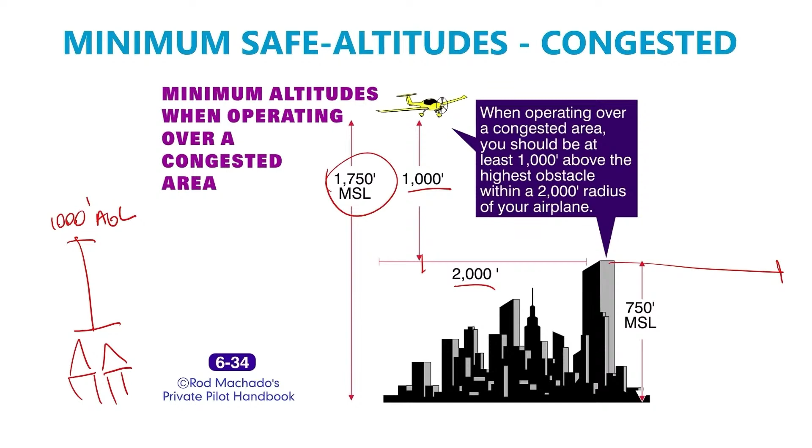The other one we have is minimum safe altitudes in what's known as an other than congested area. Very simply, if you're in more rural areas—the example I like to use is out in Camarillo, California, at the airport we used to fly at, surrounded by farmland—that's kind of that rural or other than congested area.

The magic number you want to know is 500 feet AGL, above whatever happens to be out there. If you're flying over farmland and then get a bunch of houses over the farmland, you'd want to be at 500 feet AGL, and you'd obviously want to increase that as you move into more congested areas, to at least 1,000 feet AGL. But remember that catch-all rule: you always need to be at an altitude which allows you to make an emergency landing in the event of an engine failure, without causing harm to persons or property on the ground.

The other one we also have, which is a little bit different, is in sparsely populated areas.

So this would apply if you're truly in the middle of nowhere, potentially farmland as well, or you're potentially just over water. At that point, then the thing that you need to remember is this statement right here, which is 500 feet from any person, vessel, vehicle, or structure.

So very simply, if you are cruising the open sea of the Pacific, and magically there is a Viking boat, because that's the only thing I know how to draw, sorry guys, and you're basically flying along, you could fly along an inch above the surface of that ocean. Once you start approaching that vessel, in this case, you just need to be 500 feet away from it on all sides, and then you can basically drop back down to the ocean.

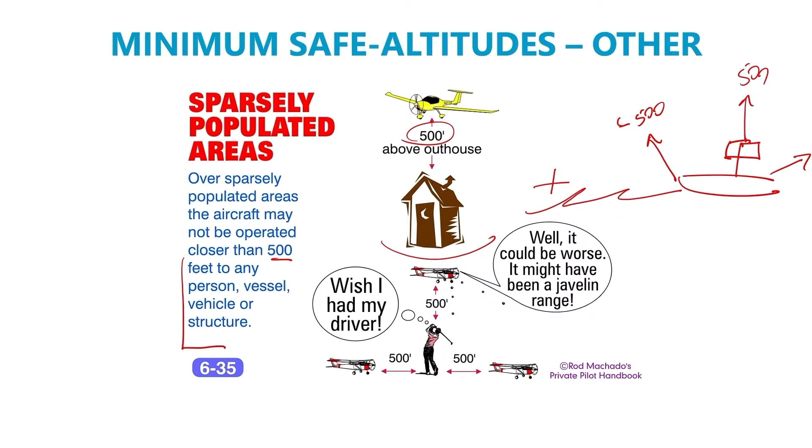Except when necessary for takeoff or landing, what is the minimum safe altitude required for a pilot to operate an aircraft over other than a congested area? Is it A, an altitude allowing, if a power unit fails, an emergency landing without undue hazard to persons or property on the surface? B, an altitude of 500 feet AGL except over open water or sparsely populated area, which requires 500 feet from any person, vessel, vehicle, or structure. Or C, an altitude of 500 feet above the highest obstacle with a horizontal radius of 1,000 feet.

All right, got the first couple answers rolling in.

Josh in Rapid City was asking, are the rules changed based on passengers? Nope, these are basically the rules regardless if it's just by yourself or if you are flying with passengers.

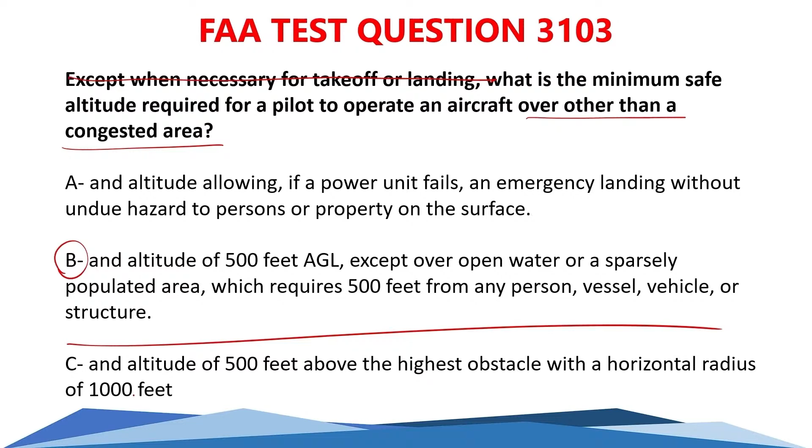Jake was asking, when flying into small airfields in a city, can you break the 1,000-foot rule if you're on approach? Yep, so obviously if you are on approach or departure, basically you're taking off and you're landing, then this rule does not apply. That's really the only time that it doesn't apply.

91-121, we learned about our altimeter the very first week of class, and the main thing that you guys need to remember is that the regulations require that any time you are operating an aircraft below 18,000 feet MSL, which is basically where Class Alpha airspace starts, you have to have a current altimeter setting at least at a minimum of every 100 nautical miles.

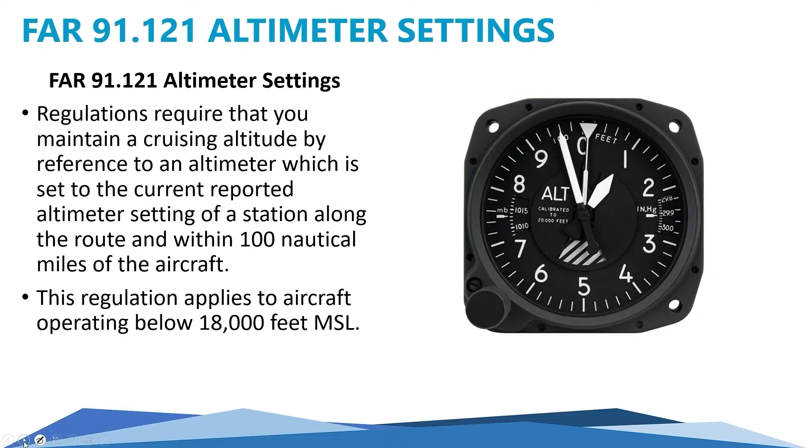So don't worry too much about how we get these. There's plenty of ways: we could get this from ATIS information when we're taking off or going to a towered airport. We can get this from different aviation weather services. We can get this from flight service stations. Really, the only thing we need to pay attention to is making sure we have a current altimeter setting at least every 100 nautical miles, since that is the regulation.

The other folks who will also provide this to you are controllers. So if you are basically going on flight following and you're getting a handoff from one controller to another, they'll go ahead and remind you of whatever the local altimeter setting is in your area that you happen to be flying in.

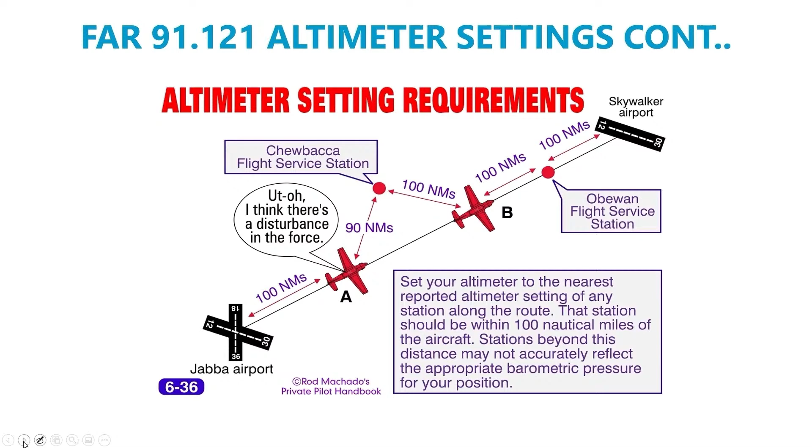91-123, this is air traffic control compliance. This is a 4-part regulation. Part 1 states that when air traffic control clearance has been obtained, no pilot in command may deviate from that clearance unless an amended clearance is obtained, an emergency exists, or in response to a TCAS, a traffic alert and collision avoidance resolution advisory.

So really the main thing is that if you guys end up getting a clearance, the only time you can deviate from it—if they tell you to hold an altitude or hold a direction—is if you either get an amendment, or there needs to be some type of emergency.

This last bit here is called a TCAS RA. The TCAS is basically mainly used for business jets and primarily in the airlines. It's basically just providing target information to the pilots of those airlines. And then the RA is called a resolution advisory.

You guys won't have this technology, but if someone basically penetrates a certain area in and around an airliner, the RA will come alive. What we're supposed to do as pilots is disengage the autopilot and manually fly it. The airplane computer will tell us to climb or descend at a certain rate—how many feet per minute—in order to avoid a collision. So you guys will not have that capability, but everything else still applies.

Part 2 of the regulation basically states that except in an emergency, no person may operate an aircraft contrary to an air traffic control instruction in an area in which air traffic control is exercised. So if there is an area that has ATC services, which is pretty much everywhere except Class Golf, and you do receive an instruction, you do have to comply with that.

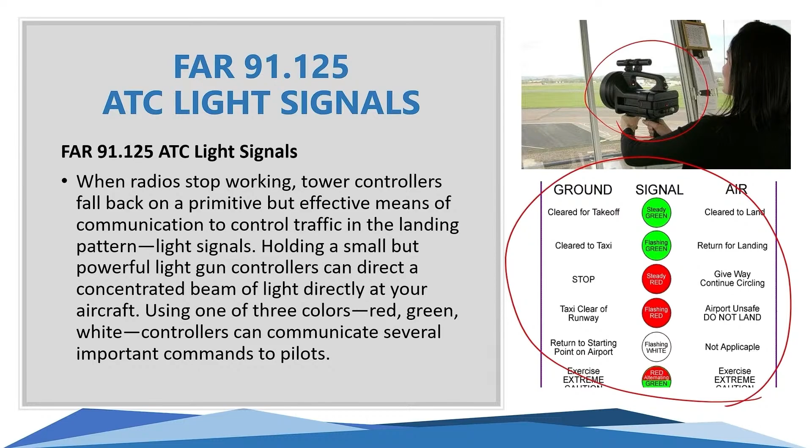Feel free to take a screenshot of it. Unfortunately, there's not too many cheats with this.

And if you're flying during the day, an additional 30 minutes of fuel. For nighttime, it's basically enough fuel to get to your intended destination, plus an additional 45 minutes of fuel.

Now keep in mind, these are your legal minimums. We're going to talk about something called personal minimums, which are usually going to be greater than the legal minimums. Some students I know will say, I refuse to abide by that, I don't want anything less than an hour in my tanks when I land. And that's something you could do.

To put it into perspective, regardless if I'm flying VFR or IFR, the IFR minimums are always going to be more strict. So personally, I always go by the IFR minimums. You guys do not need to know this, but IFR minimums mean you basically need enough fuel to get to your first point of landing, then an alternate airport, and then an additional 45 minutes beyond that. That way I've got more options.

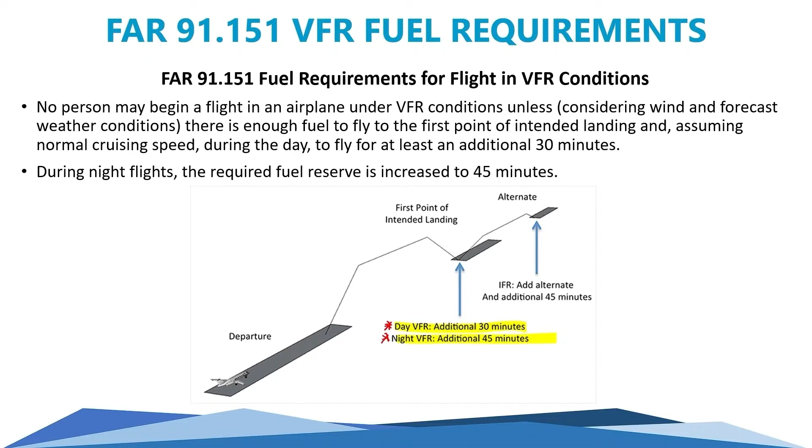All right, 91-159. We're going to use this information quite a bit, what we just looked at with fuel, and also our cruising altitudes when we do our flight planning section in a couple weeks here. Anytime we're flying for long periods of time, really anytime above 3,000 feet AGL, we are going to be at specific altitudes, either an odd 1,000 plus 500 feet, or an even 1,000 plus 500 feet. This is based upon whatever our magnetic track direction is.

Very simply, if you're flying on a magnetic heading anywhere between 0 and 179 degrees, you'll be flying in odd thousands plus 500. The easy way to remember this, sorry to all you East Coasters, but for the West Coasters, we think people on the East Coast are very odd. So if you're going to the East Coast, you need to be at an odd 1,000 plus 500. Some examples would be 3,500, 5,500, 7,500, 9,500, the list goes on.

If you're going westbound, anywhere between a magnetic track or heading of 180 to 359, you'll be at an even 1,000 plus 500, so 4,500, 6,500, 8,500, 10,500. And if you're going to basically be zigzagging, starting part of the trip going one direction and then backtracking, that's where you would actually select a different altitude.

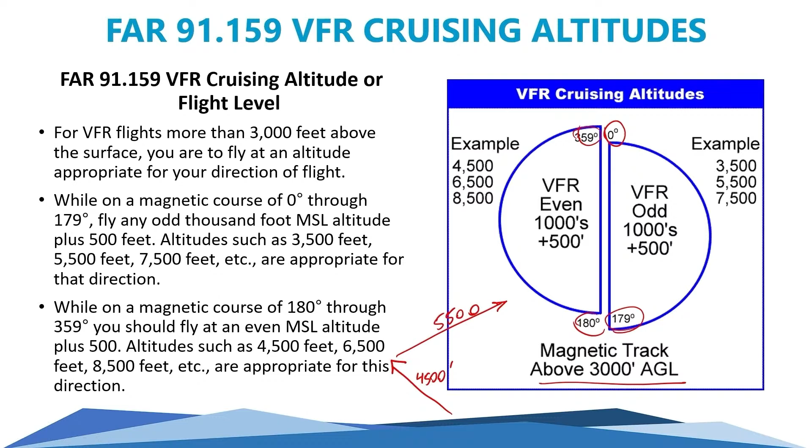Yes, west is even, odd, I know. But an easy way to remember: if you're heading east, East Coasters are odd. So if you're eastbound, it's going to be an odd 1,000 plus 500 feet. So you do have traffic split in between you. Just remember to choose the altitude that's most appropriate. We'll talk more about altitude selection when we get into flight planning, and a lot of times, at the end of the day, altitude is your friend.

91203, you'll notice a couple abbreviations. AC is aircraft for short, so these are your civil aircraft certifications. This is an acronym we use called ARROW, so you'd want to write this one down. These are things that have to be on board the aircraft anytime you want to fly. So if any of these are missing, the aircraft is not going to be deemed airworthy, and you're basically grounded until you get the documents.

So the first one is the Airworthiness Certificate. We talked about that a couple days ago on Monday. It's basically a document very similar to the birth certificate of an airplane. When it rolls off the factory line, it will have a date of issuance and someone who signs it from the FAA. It never expires.

Next one we have is your registration. So just like a car, we have to register an aircraft, pay our $5 every 3 years. It is valid for 3 years, and very simply, it'll have the name of the owner or the flight school on it. If you flip it over, there's about 5 or 6 reasons why a registration could become void.

So some of the biggest and obvious ones: if you destroy the airplane, then it becomes void. If you sell the airplane to a new owner, the registration becomes void. If the original owner loses their citizenship, or transfers ownership, or changes the tail number to a non-N number, that will also void the registration. So a couple examples there.

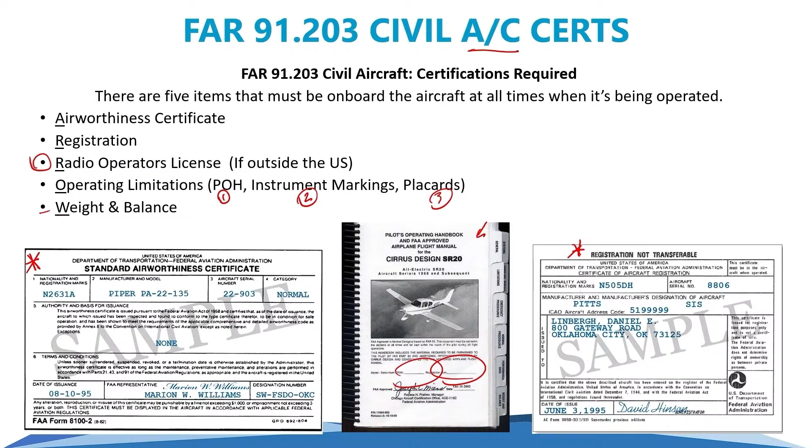All right, the next one we have is 91207. This is your ELT, also known as Emergency Locator Transmitter. It's basically a big plastic box, and the whole point of it is that in the event you got into a collision or accident or had any major contact with the ground or something else, it will automatically turn on and start doing its thing.

For the purposes of the ELT, it has to be inspected every 12 calendar months. What they're doing is inspecting it for installation, operation, battery corrosion, and for basically the presence of a sufficient signal that's radiated from its antenna.

These will usually be transmitted at least at a minimum on our emergency frequency, which is known as guard frequency on 121.5. And then some of the newer ones are also on the 406 frequency as well.

So if you want to test the ELT, you can do so only during the first 5 minutes of the hour, and you're only allowed 3 sweeps with it. So if you had a handheld radio, or if you're using the radio in the airplane, you could turn this guy on, and you'll actually hear the pings every single time that it passes.

The other thing you also need to do is, within this device there are batteries, and you have to replace the batteries at half of its useful life, 50% of its useful life, or if you've used the device for 1 cumulative hour of use. There's usually no Hobbs meter or anything that tells you how many hours you've used it. So if you think you used it for a significant or sufficient amount of time, you'd probably want to replace it anyway.

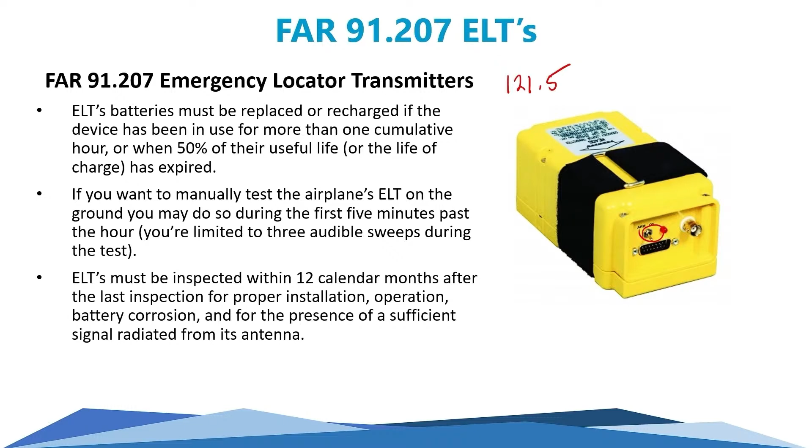So this is all basically recorded in an aircraft book, and then we know exactly when the battery came out, or it's basically going to expire in, let's say, 2031. So 50% of that would be that we would replace it basically in 5 years from now, which would be 2026.

Aircraft lights is 91209. Remember that official nighttime for airplanes is considered from sunset to sunrise. So very simply, from sunset to sunrise, you have to have your position lights on. These are usually going to be located on the pilot side - we've got the red light. There is a green light on the co-pilot side or passenger side. And in the very back, which we can't see, there's usually going to be a white light. So position lights always have to be on from basically sunset to sunrise.

Your anti-collision lights always have to be on regardless of the time of day, anytime the airplane is basically powered on or in operation. Traditionally, when we turn the battery master on when we get into the airplane, the rotating beacon or the anti-collision light is really the first light that's going to be on. And that's going to warn people that this airplane is about to start up, or it's currently in operation, meaning the engine is currently spinning.

Depends on the aircraft that you fly. For the most part, the anti-collision lights are traditionally in the Cessnas - they're usually going to be like a red light at the very top. Some of the other planes might have one on the bottom as well. In some Pipers I've seen, there are actually strobe lights on the wing tips that basically flash consistently. So you're going to have to figure out, depending on your aircraft, what is going to be considered your anti-collision lights as you're flying. That always needs to be in operation.

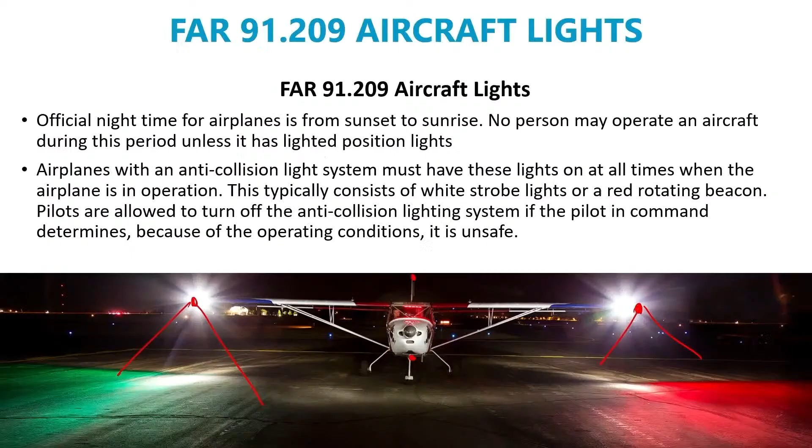All right, your transponder requirements are in 91.215. We're not going to talk about how a transponder operates, we'll get into that a little later today, but for now this is just the regulation. I'm going to show you an easier chart to memorize this rather than just looking at the words, since a lot of people get confused with that.

The other thing someone was asking about the other day is ADS-B. You do have an ADS-B requirement as well, your automatic dependent surveillance broadcast. We'll talk more about the mechanics of that system when we come back from the break. But right now I want to show you a chart exactly where you're required to have a transponder and an ADS-B. They are kind of two separate systems.

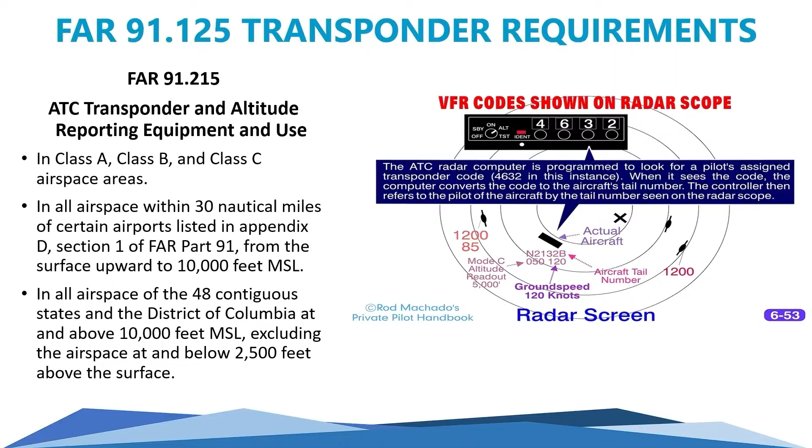The most basic transponder is just going to provide your location to air traffic control, and a Mode C transponder, or altitude encoding transponder, shows not only your position but also your altitude. As of January of last year, it became a requirement to have ADS-B installed in certain locations depending on where you flew. Now, even though this slide says ADS-B, the requirements pretty much align with your transponder requirements. So let's look at them side by side.

So very simply, for both ADS-B and a transponder, anytime you're operating in Class Alpha airspace, you're required to have an ADS-B and a transponder.

Simple as that, which is basically going to be from 18,000 feet to flight level 600. Anytime that you're operating in Class Echo airspace above 10,000 feet, ADSB is required and also a transponder, except for the space 2,500 feet AGL, where it's not required for ADSB or the transponder.

Anytime that you're operating in Class Bravo airspace, both an ADSB and your transponder are required from surface to 10,000 feet. Anytime that you're operating in a Mode C Veil, both your ADSB and a transponder are required from surface to 10,000 feet, on a 30 nautical mile radius that surrounds your Class Bravo airport.

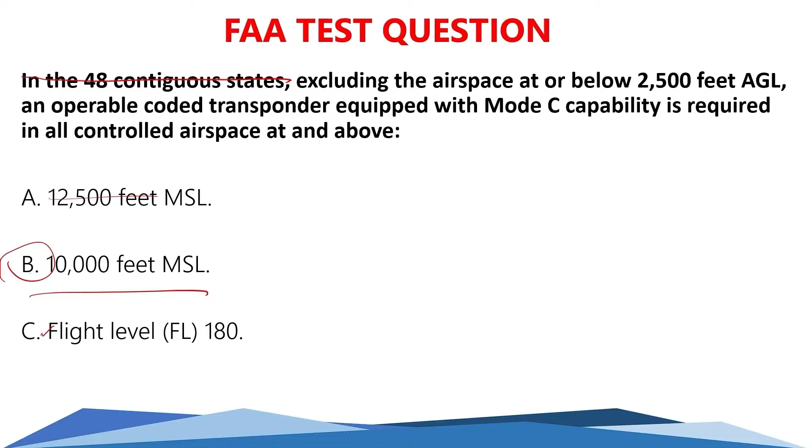If anybody wants to look at that again, it's saying excluding the airspace at or below 2,500 feet AGL, the operable coded transponder equipped with Mode C, which is that altitude encoding, it's going to be from 10,000 feet and above. Okay, so that's what the question is looking for. But flight level 180 is 18,000 feet.

Thanks, Douglas. All right, so going back just a step here, this is FAR 91.117, which is your aircraft speed limits, and it's going to be dependent upon what altitude you're actually flying in, and then of course what airspace you're actually flying in as well.

So very simply, anytime that you are above 10,000 feet, I don't really like to say this, but the books always tell you this, it's going to say no speed limit. The reality is that there is a more obscure FAR out there as well. So there is technically a speed limit, and the speed limit is anything below the speed of sound. So basically no sonic booms are allowed. But don't worry, your Cessnas and Pipers are never going to get up to that speed anyways. So generally, we usually say there is no speed limit.

Anytime that you're below 10,000 feet, your speed limit is going to be 250 knots. And keep in mind, all of these speeds are going to be indicated. It's not based on true airspeed, ground speed, or anything else in between. It's whatever you see on the face of your airspeed indicator, your indicated airspeed. If you're flying within Class Bravo airspace, it's also 250 knots.

And if you're going to basically be flying below a Class Bravo, meaning right below a shelf of a Class Bravo, or through one of those VFR corridors through a Class Bravo, it will be 200 knots, or as specified, at least for special flight rules situations.

The final one that we have is if you're flying within Class Charlie or Delta airspace, keep in mind that it's this specific requirement: no person may operate an aircraft at or below 2,500 feet above the surface within 4 nautical miles of the primary airport in Class Charlie or Class Delta airspace at an indicated airspeed of more than 200 knots. Okay, so what most people get wrong on this, though, is if we kind of go back to the dimensions.

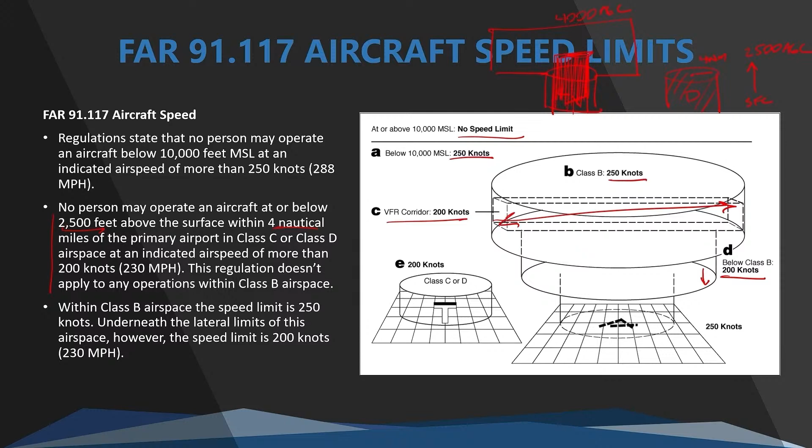The next one is 91.303 for aerobatic flight. Keep in mind that you cannot conduct any type of aerobatic flight over a congested area of a city, town, or settlement. The other thing you can't do is do it over an open air assembly of persons, or when less than 1,500 feet above the surface, or if flight visibility is less than 3 statute miles. So a lot of people ask, how do they do these at airports? They get waivers that basically bypass some of these rules, and they're very specific waivers that can be requested from the FAA.

You're also not allowed to conduct aerobatic flight within the lateral boundaries of the surface areas of Class Bravo, Charlie, Delta, or Echo airspace designated for an airport. You also want to stay away from any federal airways, which are kind of like highways in the sky with a lot of aircraft going back and forth, so they don't want you doing loops and rolls in that more congested part of the sky. Also, not every airplane is capable of aerobatic flight. If you're interested in aerobatic flight, make sure you go up with someone sufficiently trained as an instructor in that area. It's a unique type of training in itself.

91.307 deals with parachutes. Very simply, if you intentionally pitch the nose up or down more than 30 degrees, or intentionally bank the airplane right or left greater than 60 degrees, then each occupant inside that aircraft has to be wearing an approved parachute. That's really the rule with parachutes.

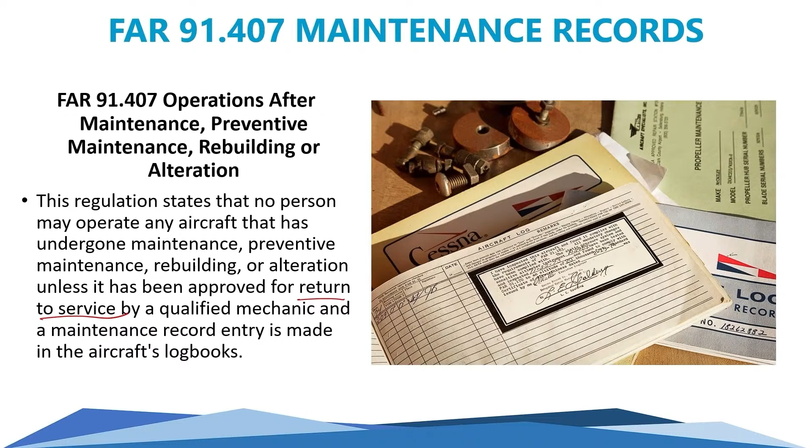Just like you have a logbook as a pilot recording all your hours, airplanes generally have 3 sets of logbooks: one for the airframe, one for the power plant (the engine), and usually another one for the prop as well. Depending on the type of aircraft, some of these can get fairly lengthy, and some older aircraft will have multiple versions or copies of the logbooks.

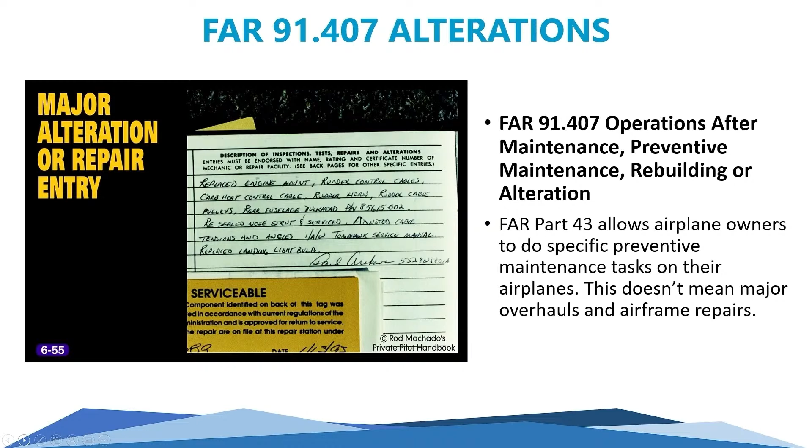Part 43 of the Federal Aviation Regulations, which deals with maintenance, basically allows the owner of an aircraft to do specific maintenance tasks. Keep in mind you need at least a private pilot license or higher—student pilots cannot sign off on this type of work. But this also doesn't mean you can do major overhauls. You can't take the wings off or repair major things, and you can't just replace an engine. That's not going to be considered preventative maintenance.

You can find the full list of preventative maintenance in 91.407. This isn't an all-exhaustive list, but if you go to the regulation you'll see even more things. Very simply, preventative maintenance—which can't be done by a student pilot, but can be done by a private pilot or higher—includes changing spark plugs, changing or replenishing hydraulic fluid in the brake lines, changing brake calipers, servicing landing gear, wheels and bearings, changing tires, doing oil changes, cleaning or replacing air filters, and replacing hoses. Those are all preventative maintenance.

At the end of the day, if you are doing preventative maintenance on your airplane, you will need to make an entry into the logbook.

You're basically going to do a quick narrative of whatever you accomplished. You changed the oil with 100 weight oil, and you put in 12 quarts, whatever you ended up doing. Change the oil filter, sign it, put in your certificate number. For you, that will be your pilot's number, and then the type of certificate that you held.

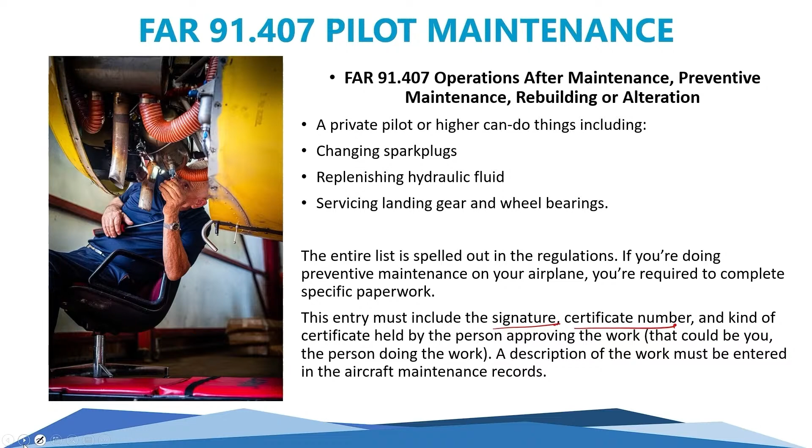So there's actually two different types of inspections that you're going to see. The annual inspection is due annually, every 12 calendar months, and no matter what, an annual needs to be done. Every single airplane that is flying has had an annual basically performed on it. And the annual is exactly the same inspection that would actually happen at the 100-hour inspection as well.

The two biggest differences between the annual and the 100-hour is that the annual has to be done by someone who is certified, basically an A&P, IA. The A&P is an airframe and power plant mechanic. The IA is the important part, and they basically have inspection authorization, and they've undergone additional training. They've taken some additional tests.

I think, don't hold me to it, some A&P can correct me, I thought it was like 3 years of experience as a basic A&P. Once they have that, they basically get these magical letters after their A&P license, and they can certify things on behalf of the FAA. One of the things they're usually certifying is the annual inspection.

So every airplane needs to have an annual. In the event that 12 calendar months comes and goes and an annual is not performed, that airplane is effectively grounded until it is performed. Now there's one way to get the airplane in the air, and it's really just in pursuit of maintenance. We can get that by requesting a special ferry permit, directly with the FAA local office, known as the FSDO, the Flight Standards District Office.

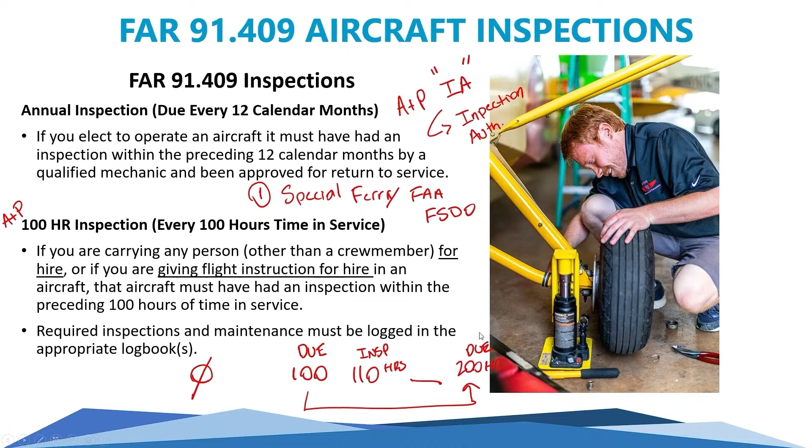91413 is your transponder inspection. Your transponder, just like anything else, needs to be inspected every 24 calendar months. They're going to put in the maintenance record, usually in your airframe log, the description of the work, and someone will sign off on it, and then it will be good for another 2 years.

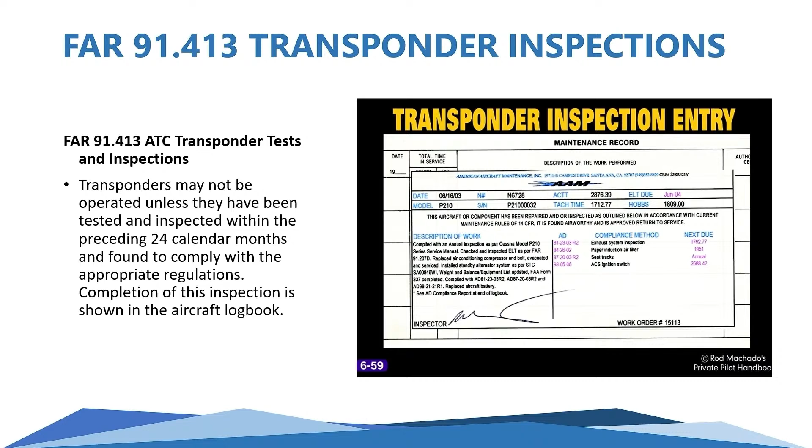Your maintenance records, 91417, as well as your maintenance records, are going to have all of your records for the annual inspections, the 100-hour inspections, major alterations, repairs, anything that's minor, and also any other required maintenance. Any frequent and additional inspections that may be performed on the aircraft, also known as airworthiness directives, will also be within these documents.

Most of these times, actually every time I've seen these, they're usually kept in a safe. Really, the value of your aircraft is tied up into these records, so they don't want them to disappear for a student to grab hold of them.

You do always have the opportunity, and you will be expected on your check ride, to pull out the official maintenance records and demonstrate that all of the required inspections we've talked about thus far have been completed, so that the examiner knows that you know how to check this information as well.

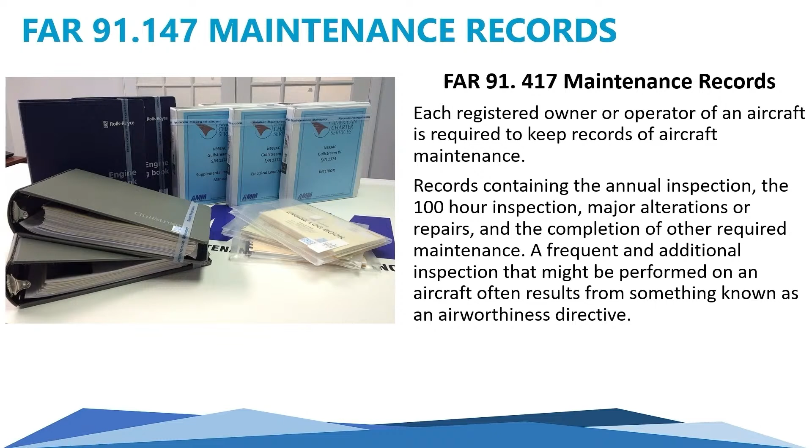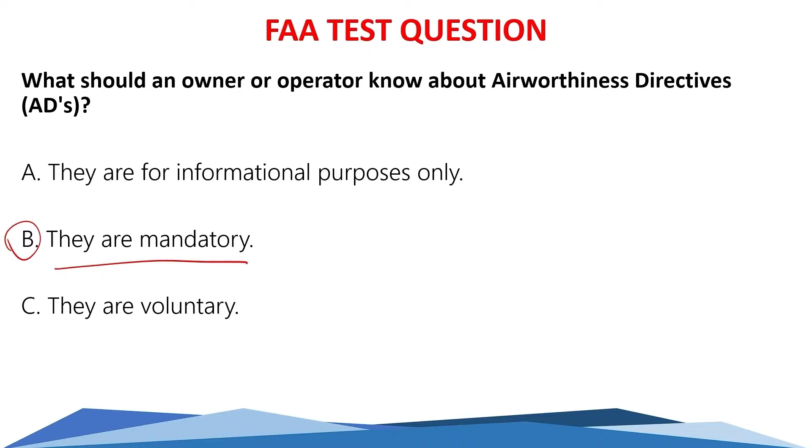All right, moving on. The next thing we're going to talk about is your NTSB regulations. These are basically what we call NTSB Part 830. They are slightly different than your federal aviation regulations, and these deal with any type of accident, incident, and your reporting responsibilities. Hopefully, at the end of the day, nobody ever has to actually utilize this other than just memorizing a couple components for the purposes of your written exam.

Now, if you do have the FAR AIM that I showed you guys the other day, pretty much every FAR AIM, all the publishers do include the NTSB Part 830 requirements in there as well, usually as a chapter, just because it's fairly pertinent to you being a pilot, okay? So with that, let's go ahead and take a look at a few things.

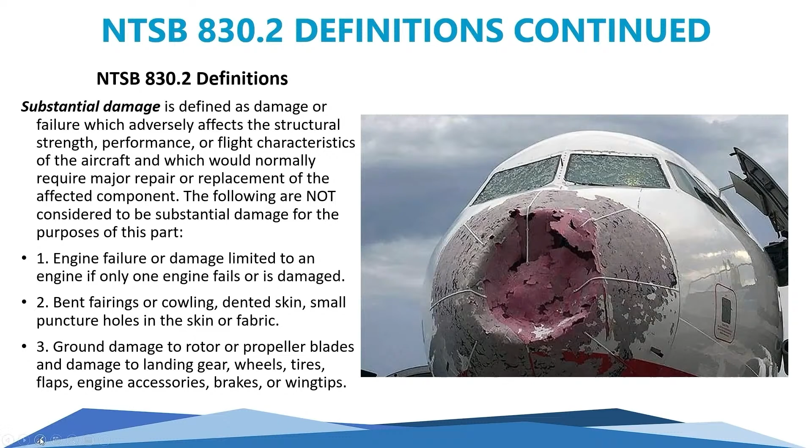Now there are, I believe, 8 different circumstances in which you are required to make an immediate notification. We'll talk more about what immediate notification means here in a second, but here they are.

The first one is any type of flight control system malfunction or failure. So obviously if your ailerons, your elevator, any of these major systems failed, those are all considered flight control systems. Inability of any required flight crew member to perform his or her normal flight duties as a result of injury or illness.

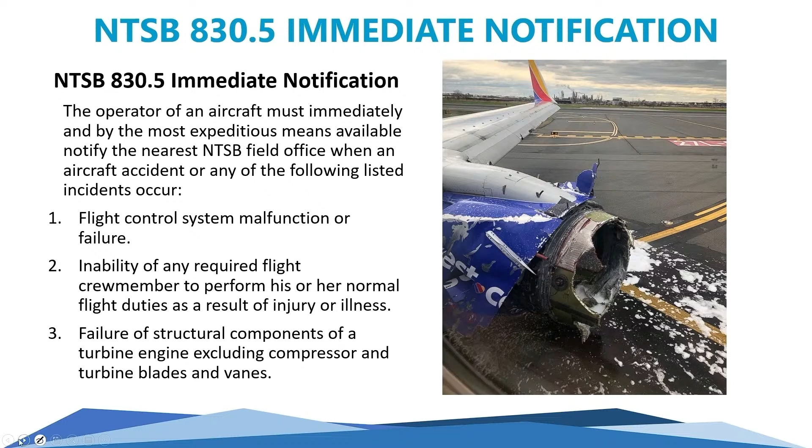Failure of structural components of a turbine engine, excluding compressor or turbine blades or vanes, won't really apply to you guys here. In-flight fire, any type of collision in flight.

This one you guys will see as an FAA test question, and it's important to know this number right here: damage to property other than the aircraft, where the estimate has to exceed $25,000 for repair or fair market value in the event of total loss.

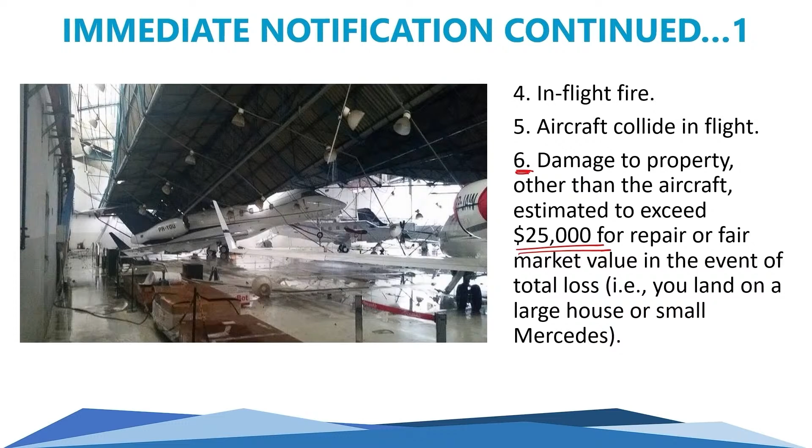So in this example, if you decide to accidentally taxi and clip the corner of a building, maybe a large hangar like this, and that corner happened to be a load-bearing wall, and the rest of the hangar dropped on all these wonderful aircraft out here, any time it exceeds $25,000, that would be an immediate notification. If it's $24,000 of damage, then it's not. So the threshold here is $25,000, and it also does not include damage to your airplane, but any other property damage or other aircraft damage is included.

There's a cool video on YouTube of a guy flying an experimental or home-built aircraft, and the next thing you know, he loses his prop blade. It just completely flies off. He makes a very good and safe emergency landing without the prop, gliding it back in. But if you lose the blade for whatever reason and it separates from your aircraft, that is an immediate notification.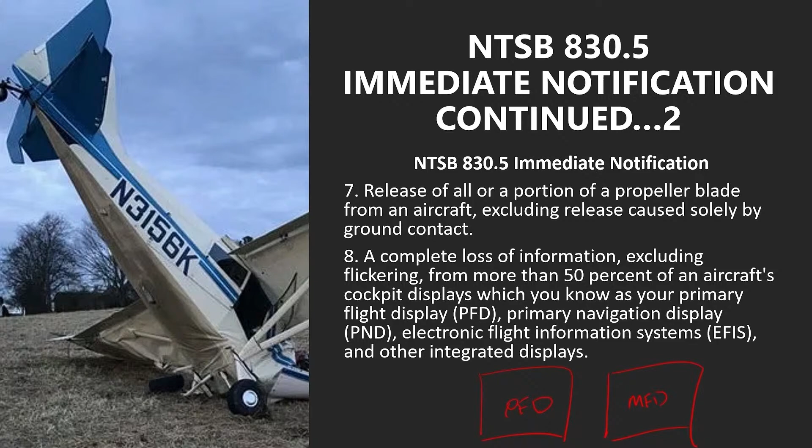Very simply, for those in the G1000, you're pretty much only having 2 screens. You've got your primary flight display known as your PFD, and you've got an MFD, which is your multifunction display. Effectively, if you lose one of those screens, then you'll have to make this notification as well.

NTSB 830.10 is dealing with any type of wreckage, mail, cargo, and records. What are your responsibilities? So if you're the operator of an aircraft that's involved in an accident or incident, it's actually your job to protect the wreckage and everything associated with it until the NTSB arrives and then assumes responsibility of the scene.

Keep in mind, obviously, rescue passengers and crew. Make sure everybody gets a safe enough distance away from whatever that is, and deal with any hazards as they come up. And then from that point, it's going to be just trying to protect the wreckage from any further damage, and also protect it from the public, so prevent anybody else from getting injured with it.

If you need to move wreckage, remember to make a note of it, take a photo of it, draw a sketch of it—whatever the original condition is. Basically, it's a federal crime if anyone was to take a part of that wreckage as a souvenir.

A couple of people back in 2003-ish, during the unfortunate space shuttle re-entry where it broke up over Texas, decided to take souvenirs from that accident. They were actually punished under that NTSB rule there.

NTSB 830.15 is basically your requirements in terms of when you need to report it. And these are the numbers that we need to memorize here. So an operator of an aircraft must file a report within 10 days after an accident, or within 7 days if an overdue aircraft is still missing.

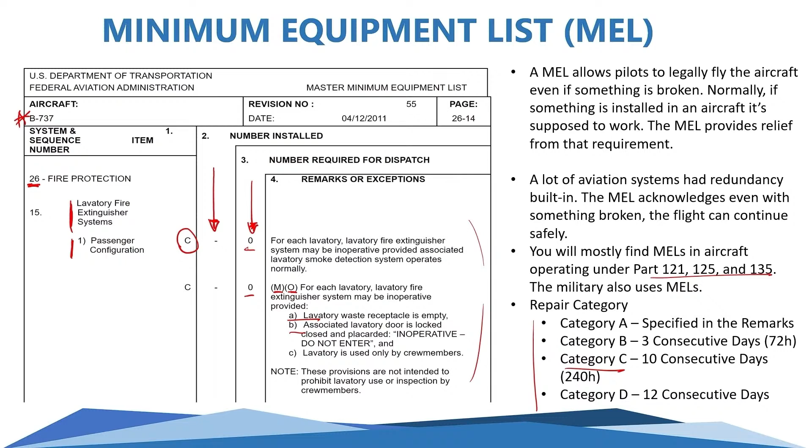Okay, so what we're going to do when we come back is we're going to do an airplane without an MEL, and we're simply going to follow this AC circular. Now, this AC circular 91-67 is no longer valid, it's an expired circular, but if you read the regulations, you'll see that all of these steps that I'm basically showing to you guys right now are in the exact same order, and I think it's still a good guidance document.

And the important thing that we're going to go through is each one of these steps. We're going to assume that one of our taxi lights is not working and we're doing a nighttime flight, and we have to go through step 1, 2 through 6.

A lot of students, what I see, have problems with their check rides is they jump immediately to step number 4, or they don't do it in the correct order. You do need to start from the top and work your way to the bottom and do it in the correct order for the purposes of your check ride.

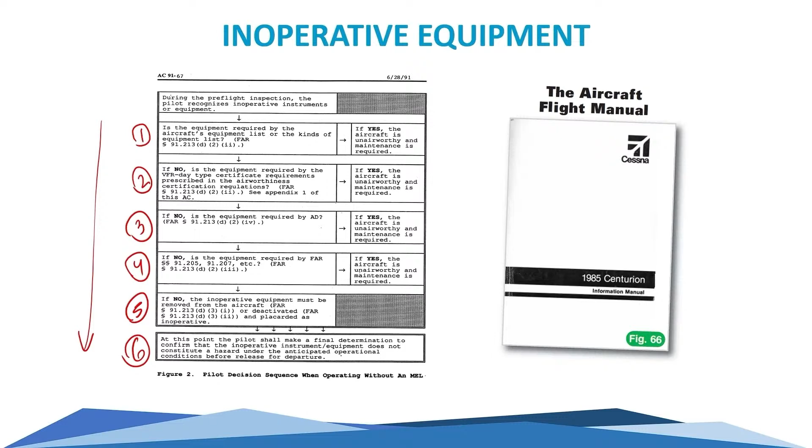So what an equipment list looks like and where we find that information is located inside of the airplane or aircraft flight manual, the AFM, or the pilot's operating handbook for your airplane. What you would do is go to the following chapters. Traditionally in the newer aircraft books, you would find your aircraft equipment list in chapter 6, if it exists, and you'd find your kinds of equipment list, the KOEL, in chapter 2. So you'd want to check both locations.

Once again, you may have one or the other, you may have none — it just depends on the manufacturer. Very simply, if we're looking at an aircraft equipment list, this is found in your weight and balance section, chapter 6. Really what we're doing is looking for the item number, anything that basically has an R after it. The R represents that it's a required item of equipment for the FAA certification.

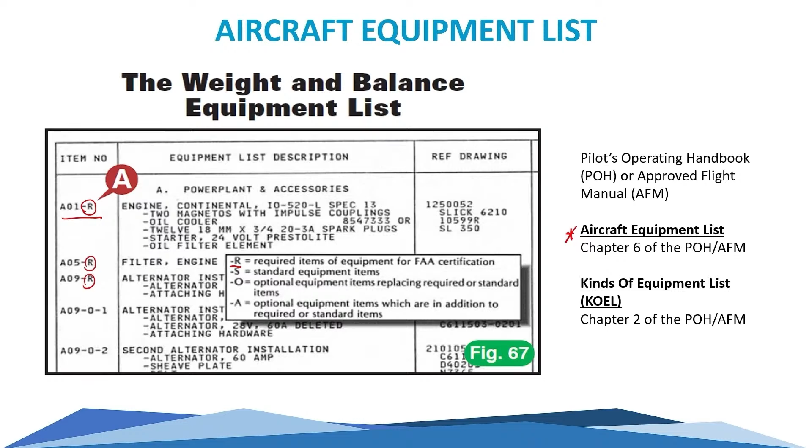So if anything with an R, an item number with an R, is broken or inoperative, then that means the airplane is effectively grounded until it is fixed. The other letters we have are S for standard equipment, O for optional equipment which replaces the required or standard equipment, and A for optional equipment and items which are in addition to required or standard equipment.

So the very first thing, assuming our airplane did have an equipment list, we would go to chapter 6 and look at the equipment list. For example, if the electric clock inside of the airplane was broken, we can see here that a basic clock is standard, and the optional upgraded digital clock is also not a requirement. So if that was the case, we would go to step number 2.

Now, if the magnetic compass was broken, maybe it was leaking fluid, or our fuel gauges were also broken or separately broken, then because it is a required item for certification, the airplane is going to be grounded until those items are fixed and signed off by the associated mechanic. So that's what an equipment list looks like.

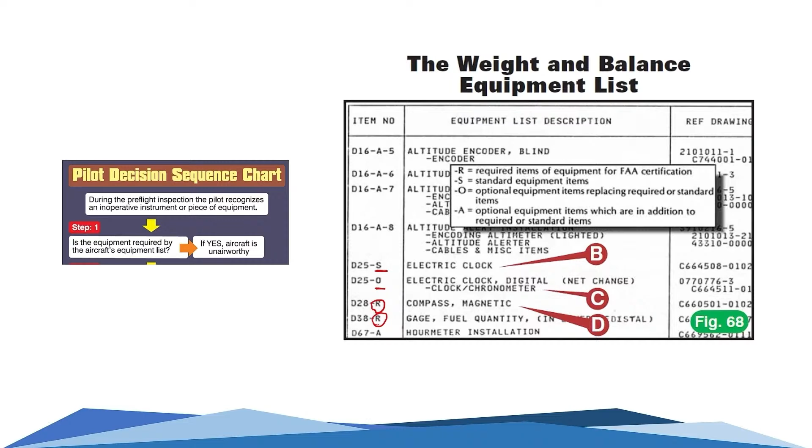If you do not have an equipment list, you might have what is known as a KOEL, which is a kinds of equipment list. This is one that I pulled from a Piper Warrior, basically a PA-28-161. This is located in chapter 2, or section 2, of the POH/AFM, where we basically have aircraft limitations.

All it does is tell you, if you're operating a daytime VFR flight, these are the things you absolutely need to have working. If you're operating at night, you need everything in the daytime list plus the nighttime list. And on the other page, they even have an IFR list. So if anything on this list was broken, depending on whether it's a daytime or nighttime flight, the aircraft would be grounded until you got that fixed.

Assuming you did not have that list, or couldn't find the item on the list - let's say we're doing a nighttime flight and our taxi light is broken, and we couldn't find it here. Okay, so that was step number 1.

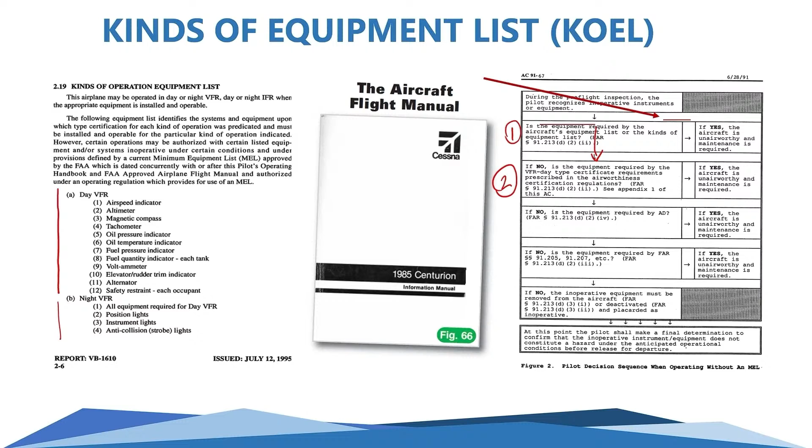If you can't find it, you continue to step number 2. It says, if no, is the equipment required by the VFR type certificate requirements prescribed in the Airworthiness Certification regulations? This is a document called the TCDS, or Type Certificate Data Sheet. You can search for your TCDS by manufacturer, make, model, or serial number.

You can go to the FAA website and search by a number of current or past models. Once you find the correct model, you'll usually find a PDF document that houses quite a few different makes and models. The one I'll show you right now is for the Cessna 172, which is a pretty common airplane.

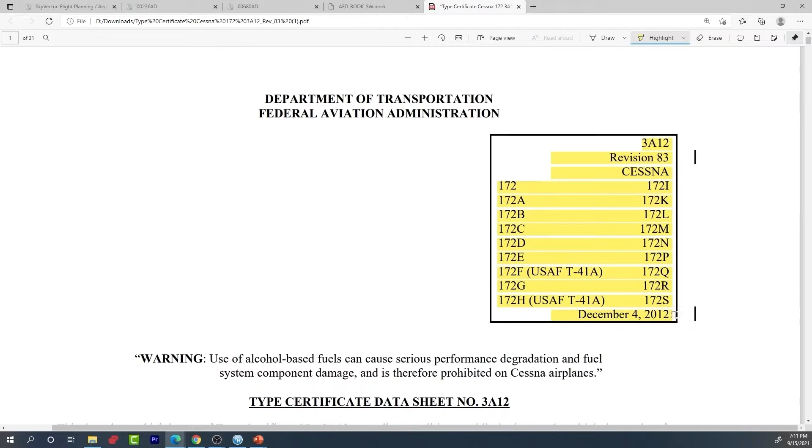This is the document right here - this is page 15, so I'll go back to the very front page. This is your type certificate data sheet. This document, about 30 pages, includes information from the FAA about all of these aircraft - all of the 172s, the basic 172, the Alpha, all the way through the Sierra models, which is one of the more recent ones.

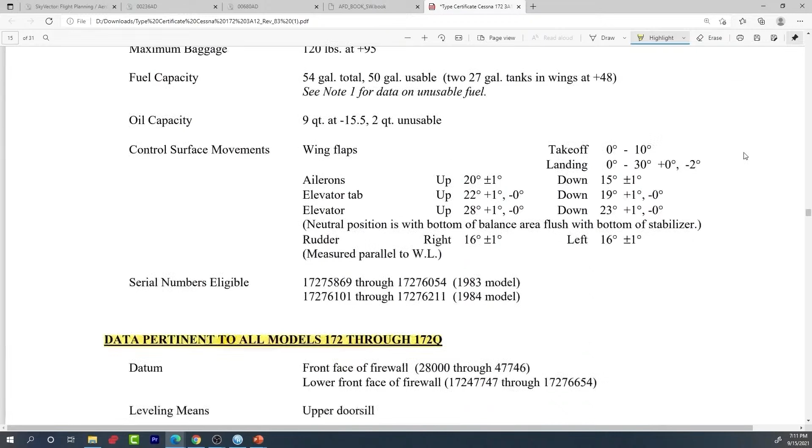Your type certificate data sheet is basically the birth certificate of an airplane. This document provides information on how the FAA actually certified this airplane to deem whether it was airworthy. So depending on the make and model - let's say we're looking at a 172 through the 172Q - it would have all the information, including serial numbers, so you can make sure you're looking at the correct airplane.

It has all the regulations in terms of how this thing was certified, what years it was based upon, and what we're looking for is the section called equipment. The equipment in all these airplanes must include a current airplane flight manual effective with the following serial number, so you'd make sure you have that information.

For number 1, if you're between model 172 through 172 Golf, you need a stall warning indicator with the following drawing, and basically the same thing for anything 172 Hotel and beyond. So for the most part, most 172s are required to have a working stall warning indicator or horn, whatever style is in your aircraft.

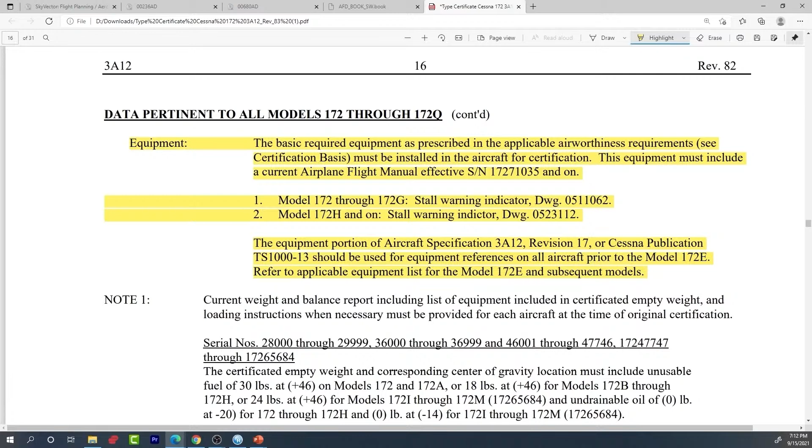So if your stall warning horn or indicator was broken, this document states that you've got to fix it, otherwise the airplane is grounded. Every aircraft is slightly different - Pipers don't have this requirement, you're not required to have a stall warning horn. It just depends, and you can find this information on the FAA website.

So that's what your type certificate data sheet is. In this case, if we look up the TCDS, we're not going to find anything required dealing with a taxi light. So then we move on to step number 3.

Step number 3 is, if no, then we cross-check against any airworthiness directives - are there any outstanding airworthiness directives we need to comply with or follow? To find airworthiness directives, you can search the FAA website, go to regulations and policies, then go to airworthiness directives, and search by make and model.

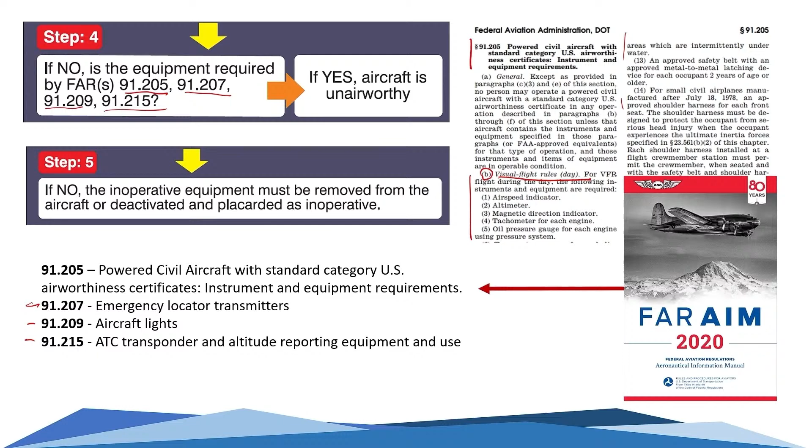The way we remember 91-205 is the following - we basically put those in a better order, we call this A TOMATO FLAMES: anti-collision lights, tachometer, oil pressure gauge per engine, magnetic compass, airspeed indicator, temperature gauge, oil temperature gauge, fuel gauge per tank.

Flotation is only for hire, and that's basically your life preservers, those types of things, assuming you're for hire and outside of gliding distance of land. Landing gear indicator for those with retractable gear, an altimeter, a manifold pressure gauge for more advanced aircraft - usually those with a constant speed or variable pitch prop, emergency locator transmitter, and then your seat belt or shoulder harnesses. It's always important to read the regulations though, because for example, safety belts, shoulder harnesses, and the anti-collision light - if you have an older aircraft, you might be grandfathered in where you're certified and don't need either one of those.

I'll leave that up for a second, let you guys write those down, and then we'll look at the nighttime ones as well. Or you guys can take a screenshot of it, whatever's easier there.

These you will get asked on your check ride, by the way, as well. You might see these on a couple of FAA tests.

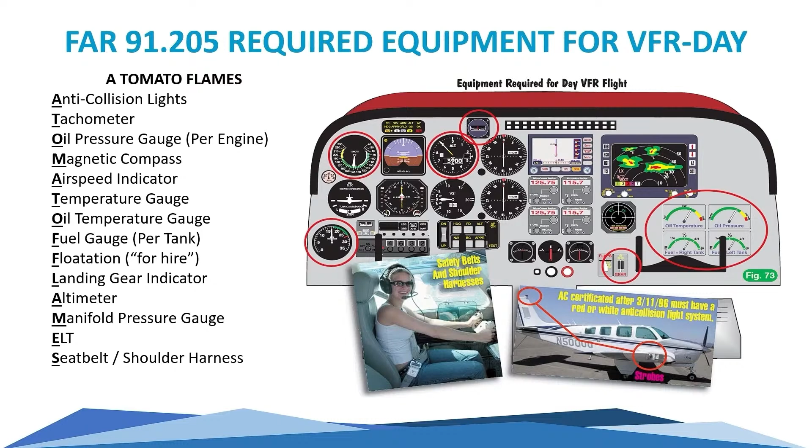After this, all of your daytime requirements apply if you are operating at night. So for us, we're saying that we're doing a nighttime VFR flight and our taxi light or landing light is not working. So what we would do is have everything within the column that we see for day. And then for our nighttime requirements, we would have to have flaps.

Most of you are not going to be operating on fuses, but if your aircraft still had fuses, you would need to carry at least 3 sets of each type. If you're on circuit breakers, then you don't need to worry about that.

The landing light is only required for hire. So in this case, we're not for hire, right? If we're a student pilot or a private pilot, we are definitely not taking people, because that's above our capabilities. So in this case, we can operate the airplane at night without a landing light or a taxi light. We are required to have an anti-collision light, a position light, and a source of power, which very simply could be a source of electrical energy like a battery.

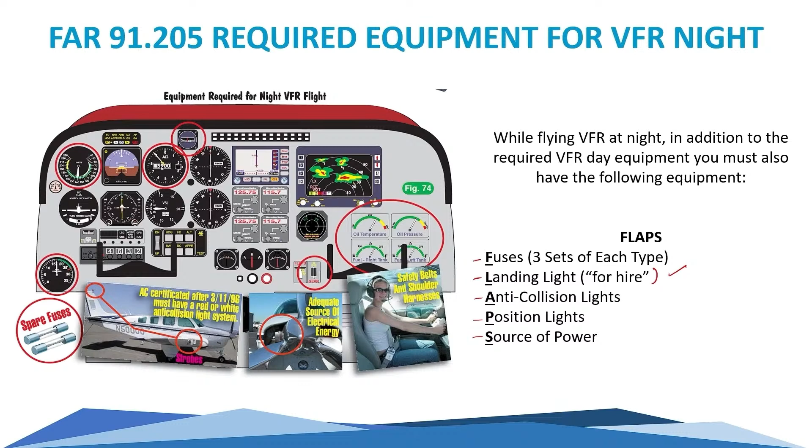Now that we know we can continue this flight, we have to do a couple things prior to jumping in the airplane. We have 2 options. The easiest way is basically to deactivate and placard whatever is broken. If you needed to do maintenance, maybe you replaced the bulb, maybe you didn't, maybe you just need to notate it or squawk it that the light is inoperative.

And then very simply, we just take either a Post-it note or one of those little printable pieces of tape and basically write the word inoperative, and put that right next to or on the circuit breaker or the switch that we have.

Now, deactivating it is usually going to be pulling the circuit breaker. If you do not know what the circuit breaker is, then just leave it alone. You do not want to accidentally turn off some other system inadvertently.

The other thing that you can do, besides deactivating and placarding it, is basically to remove it. This is not something a pilot will do. This is something usually a maintenance person will do. They will actually remove it and put it inside of the aircraft maintenance records. And if it is of applicable or appreciable weight, then they'll have to do a new weight and balance, usually if it's over a certain percentage.

Finally, after you do all of those steps, step number 6 is always the most important. We know legally that we can actually do a nighttime flight without a landing light in this circumstance. We've placarded it and deactivated it. Now we have to look at step number 6, which is: you, the pilot in command, has to make a final determination to confirm that the inoperative instrument or equipment doesn't constitute a hazard under the anticipated operational conditions before release for departure.

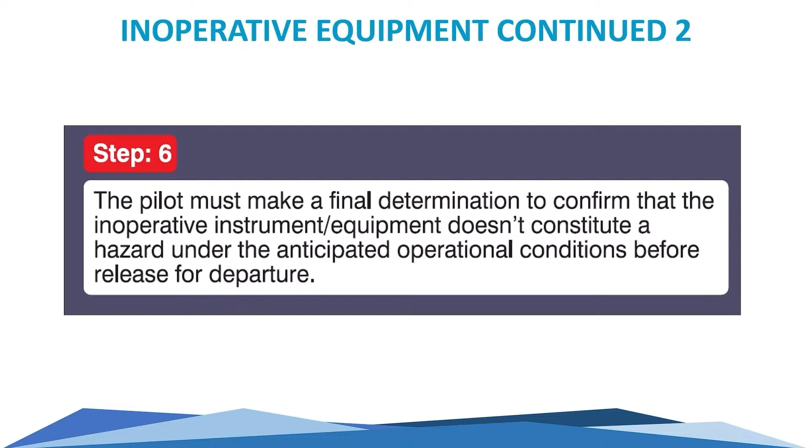Okay, so with that, let's go ahead and push on, and we're actually going to look at airport operations. As I said, this is 2 parts. We'll finish up anything we don't finish tonight on Friday, so don't worry like you're falling behind or anything. All right, so let's talk about airport layouts.

Now, anytime that we're dealing with an airport, obviously there's going to be some type of associated runway with it. And runways are not just paved in any old fashion or location. There's usually quite a bit of environmental studies that are done, and then what ends up happening is they figure out whatever the prevailing wind conditions are of that area or region.

So usually if you see only a single runway, for the most part, those are going to be the most favorable wind conditions. If you start to see a lot of different runways that crisscross, sometimes those could be either very shifty winds like the Denver area, which kind of comes from any direction at any point in time, or they may just need additional facilities to take off and land. So the airport layout is really always going to be designed around the actual runways themselves.

And the important thing here is that the runways are actually going to be lined up magnetically. Okay, so what they do is they basically pave these down, and they will round up or down to the nearest ten the number that you guys see. So for example, runway 27 is actually going to be 270 degrees magnetic, and that was rounded up or down to get to 270. So it could have been 271 or 272 degrees, or it could have been 268 or 269. We don't know without actually looking at the airport diagram.

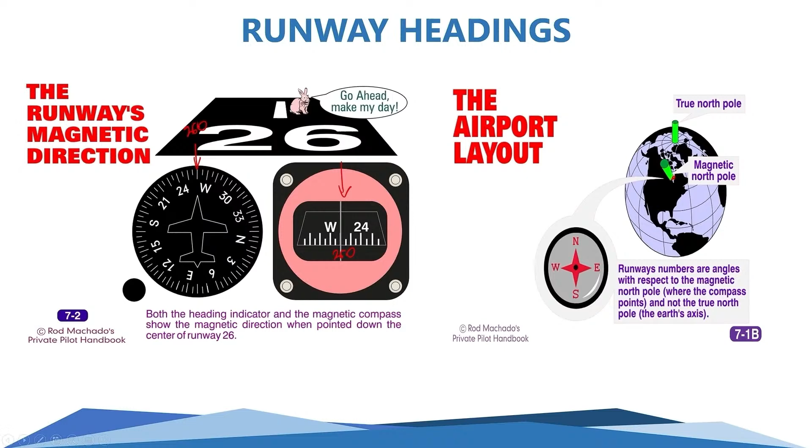Okay, so let's go ahead and look at a question here, and let's see if we can figure this one out. These are pretty easy as well. So the numbers 8 and 26 on the approach ends of the runway indicate that the runway is oriented approximately. Is it 008 and 026 true, 080 and 260 true, or 080 and 260 magnetic?

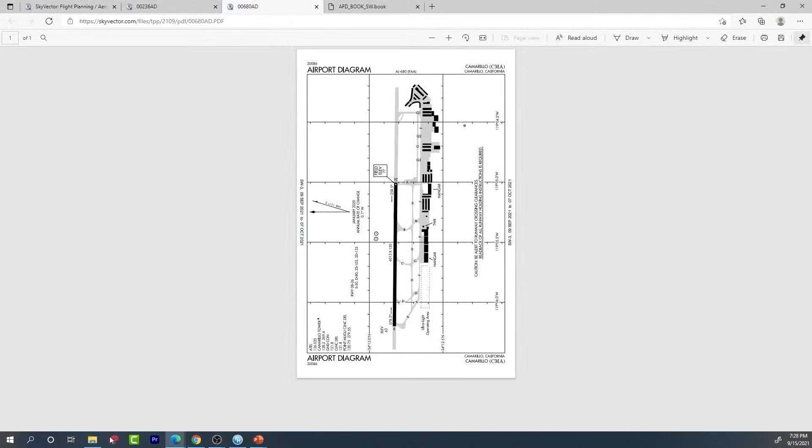Now, where you can find the exact information in terms of what is the exact magnetic direction of a runway, very simply, if you were to go to any type of airport diagram - I'll show you this one because we're going to look at it here in a minute anyways. This is one for Camarillo, California. So that was our home base a while ago. Let me go ahead and rotate this so you guys can see it.

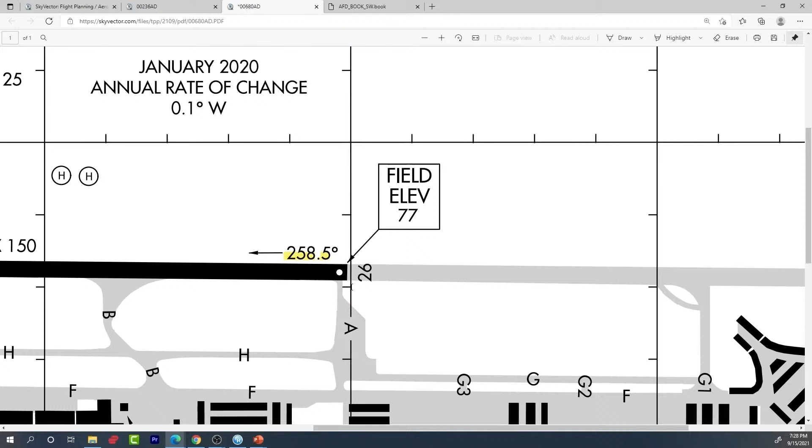Very simply, we can see here, we've got runway 26, and this right here is the exact direction. So runway 26 is 258.5 degrees. And what they're doing is they're rounding that up to 26, so that becomes 260 degrees. If we look at the flip side of it, we've got runway 8, and the exact magnetic direction of runway 8 happens to be 78.5 degrees magnetic.

They've obviously rounded that up to runway 8, so that's approximately 080. Okay, so that's how they're coming up with those numbers when we are specifically looking at it.

The next thing that we're going to talk about is the airport facility directory.

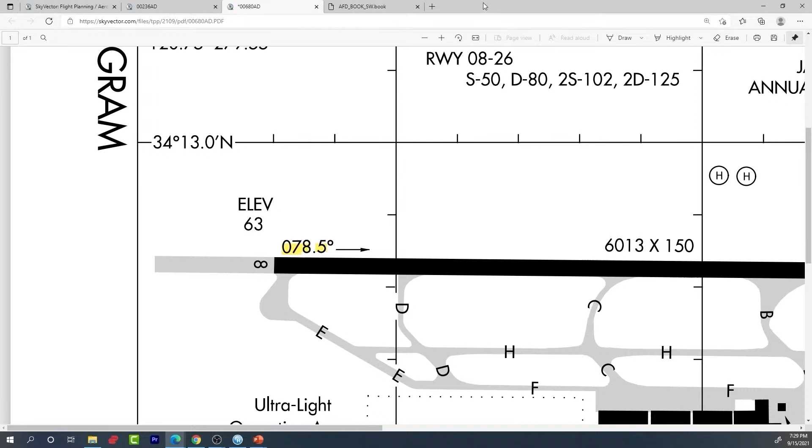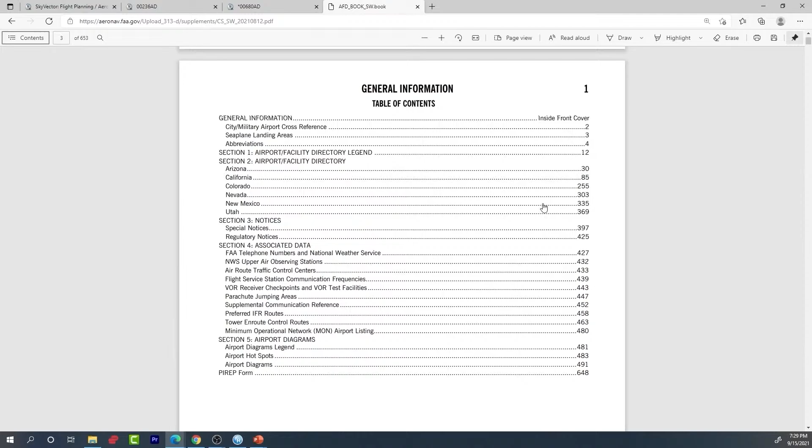They do come in different areas. The one I'm looking at is in the supplement for the Southwest area, which covers California and parts of the Southwest as well. When you guys are looking at these, if you look on the very first couple pages, there is basically a legend, and I'll let you guys look through it. But if you go through all of it first, I can't believe how many acronyms there are.

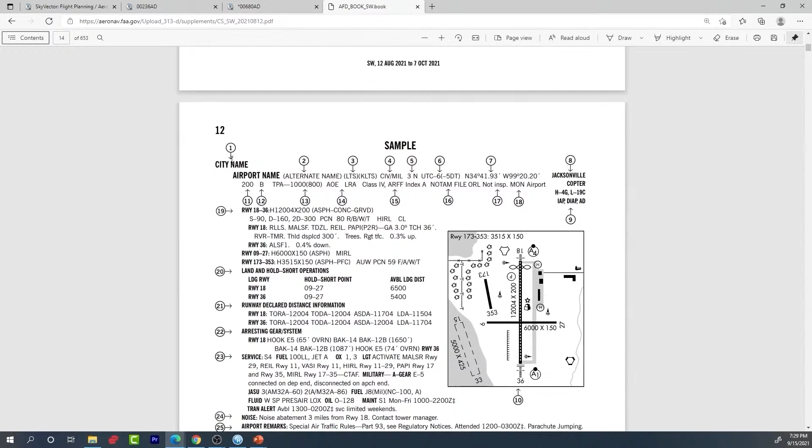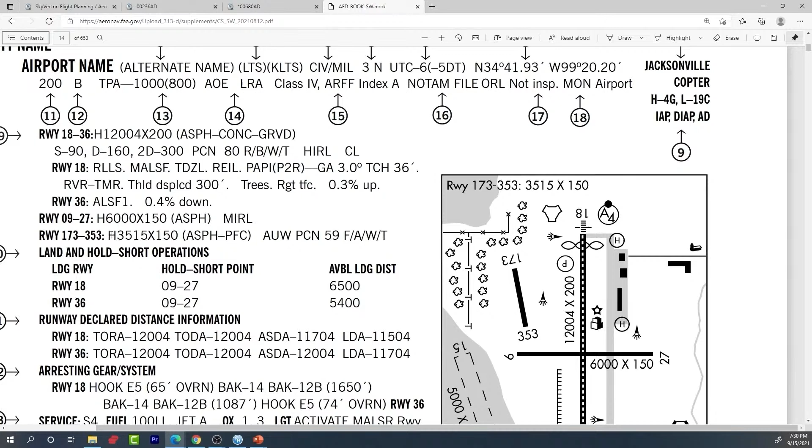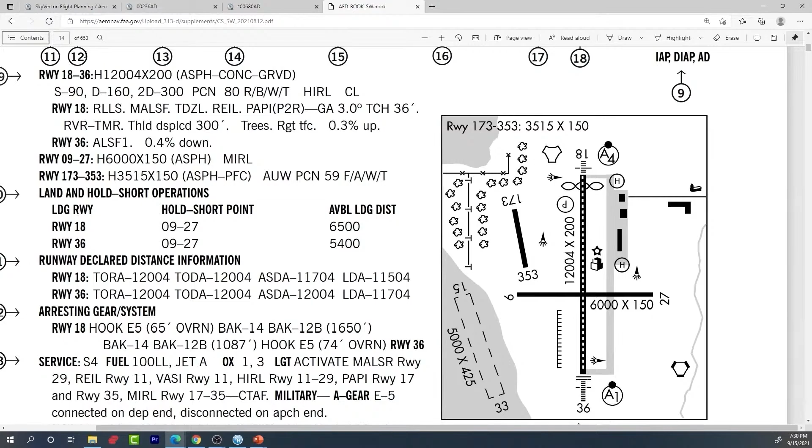Starting off around page 12, this is the sample page in terms of how to read the chart supplement. This is giving you everything under the sun in terms of what could potentially appear and how it's actually codified. I'll show you guys the highlights of this, the most important segments when we look at this, but here's a good example. Basically you can cross-reference any of these numbers, 1 through 30 plus. Just keep scrolling down and you'll see all the information right below that in terms of what are the definitions and what's supposed to be in these locations for number 1. And the list kind of goes on and on from there.

Okay, so for those that got C, great job. Let's go ahead and look at the chart supplement.

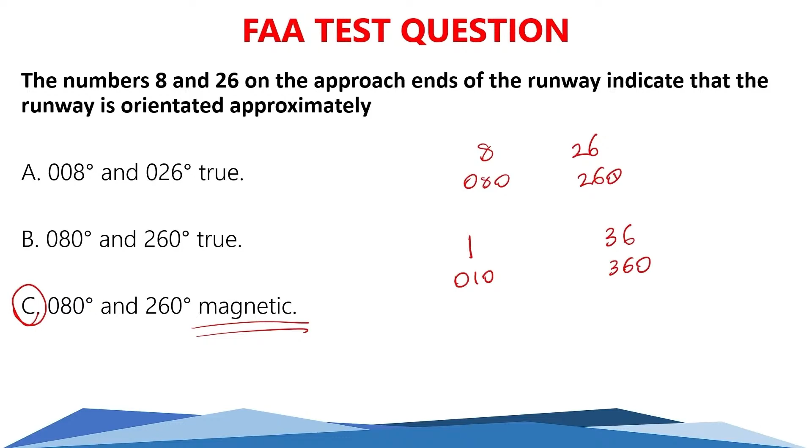So the chart supplement is formerly known as the Airport Facility Directory, AFD, for any of our older pilots out there. You'll hear me reference it as the Green Book as well. We use the Green Book for quite a lot of things to look up information. Anytime we're going to a new airport, or any airport that we go to, we want to look at the Green Book because it provides a lot of information about the traffic pattern altitude, our frequency information, hours of operation, or any other special remarks about the airport.

Now, the chart supplement is a total of 7 volumes. It covers all of the United States, Puerto Rico, and the Virgin Islands. It provides data on all FAA public airports, seaplane bases, heliports, military facilities, and also selected private use airports that the DoD wants. Within this document, you're going to be able to find all of those airports by state, and then within each state section, you'll be able to search for them alphabetically.

It does provide at the larger airports, airport sketches. You'll also have navigation aids, or nav aids, which are basically navigational equipment and frequency information in there. You have communication data, weather data sources, airspace information, special notices, VFR waypoints, airport diagrams, operational procedures. There's telephone numbers in there for air route traffic control centers. There's VOR checkpoints in there, and there's a bunch of IFR stuff as well. So you can take a look at those as we push forward, and I'll show you guys what they look like here in just one second.

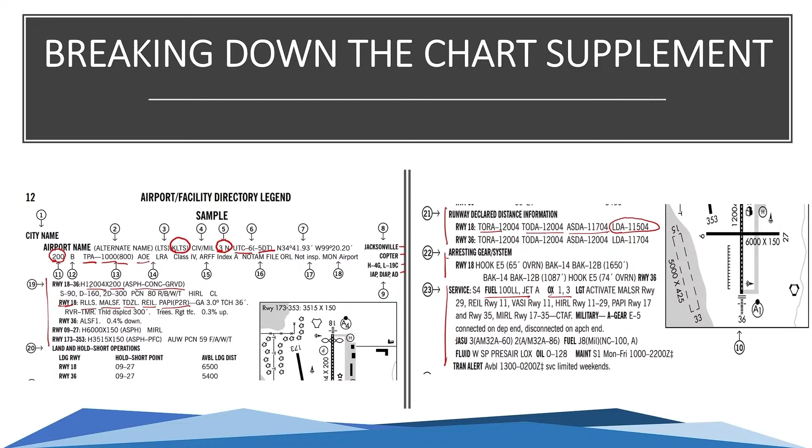Arresting gears and systems, you're only going to find those at military airports. Your services are going to primarily deal with any type of fuel. So if you need to figure out, does it have fuel? Can you refill your oxygen bottles? You can find that information here. You can also find information on pilot-controlled lighting that we'll talk about here in a little bit, and the rest of the stuff is kind of military-related as well.

Going to the next page here, depending on the complexity of the airport, you're going to find airport remarks. You always want to read through the airport remarks, see if there's anything unusual. There might be wildlife in the vicinity, you might have parachuting in the area as well, or anything that's relatively pertinent to that airport. So sometimes they're fairly short and sometimes they're fairly long.

So in this case, if I was looking at this airport, I would be interested in that there's parachute jumping, there's deer in the vicinity of the airport, and there's some type of heavy jumbo jet training from the surface to 9,000 feet. That would be something that would pique my interest.

All of the other stuff we're going to talk about, our radio communications and our weather section. So this is how we pick up our weather. That's how we figure out the frequencies to talk to ground and flight service stations, tower, and everything else in between. We also have airspace information in here, so we can see that this is a Class Bravo airport.

Any navigational aids located on the airport itself will be listed under a section called Radio Aids to Navigation. Some airports have very small chart supplement entries, while larger airports like LAX, Los Angeles International, can span multiple pages and cover lots of different charts.

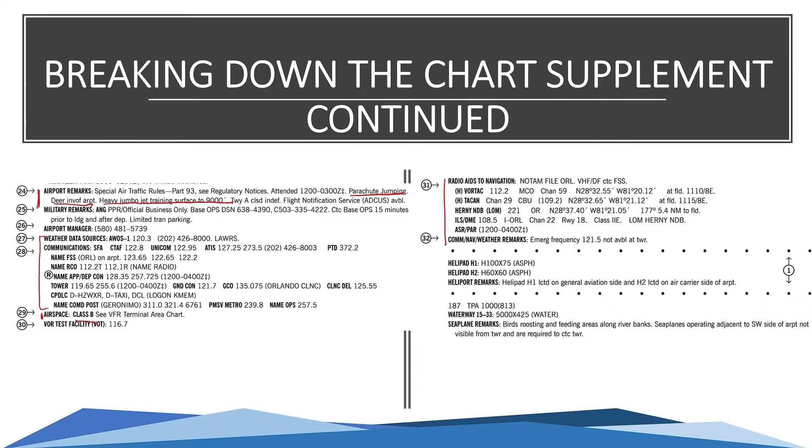It's your responsibility as pilot in command to become familiar with all available information, and that includes information within the chart supplement. Make sure you at least brief it and have a general idea of what is important about the airport you are taking a look at.

Every time you go to a towered airport, one with a control tower in operation, you're always going to listen to ATIS. On the ground, the first thing you do after starting the engine is listen to ATIS, then call ground control for taxi instructions. If flying into an airport with an operating tower, you'll listen to ATIS usually 20 to 30 nautical miles out, then talk with the tower controller for permission to enter the airspace. ATIS is your very first stop whenever going in or out of an airport with an operable control tower.

ATIS stands for Automatic Terminal Information Service. It usually starts off with 'you have information Bravo' or 'Alpha,' and it's always in the same order: Alpha, Bravo, Charlie, Delta, etc. For example, during the 7 o'clock hour it might be information Alpha, and as soon as it's 8 o'clock it might become information Bravo, and so forth.

I'll have you guys listen to two different variations of ATIS. This broadcasts non-control information at towered airports to relieve frequency congestion.

It provides information on weather—ceiling, wind, visibility, or anything else pertinent. It also provides information on the active runways, any notices to airmen, or other pertinent airport information like taxiway closures, runway closures, anything that's going on.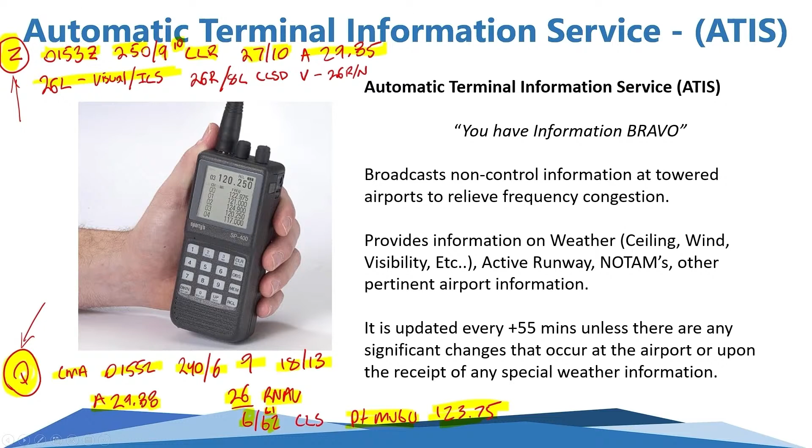Anytime that we're taxiing in and around an airport, very simply, the taxiways are always going to be alphabetical or alphanumerical. So you're never going to have a taxiway that starts with any type of number. Numbers 1 through 36, and really any number, is going to be associated with runways, so that way we don't get it confused.

Taxiways will usually be Alpha, Bravo, Charlie, or at larger airports you could have Alpha Alpha or Alpha 1, Bravo 2, whatever the numbers are, but it will always be alphanumerical. A number by itself is going to indicate that that is specifically a runway.

We found out that they were effectively broadcasting, was it Quebec, I believe? Quebec. So I would write down all that information, and then I would contact ground to basically get my taxi instructions. Very simply, I would let them know, Camarillo ground, Cessna 1234, I'm over at, I don't know, ABC Flight School, and I'd like to do a straight out departure. I have information Quebec. And then from there, they're going to go ahead and give me some taxi instructions.

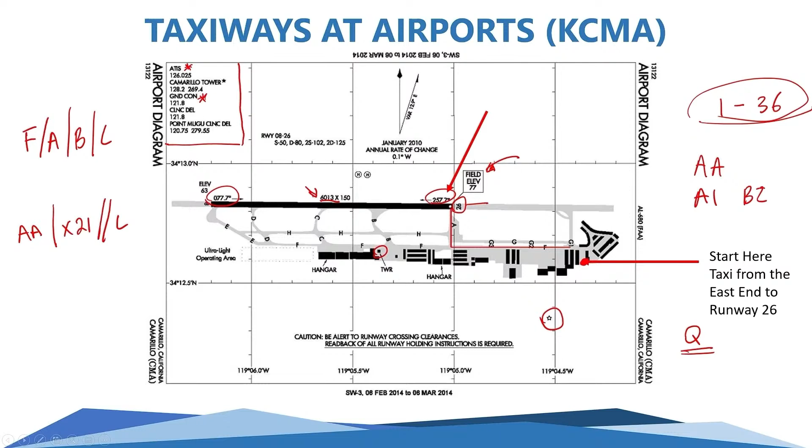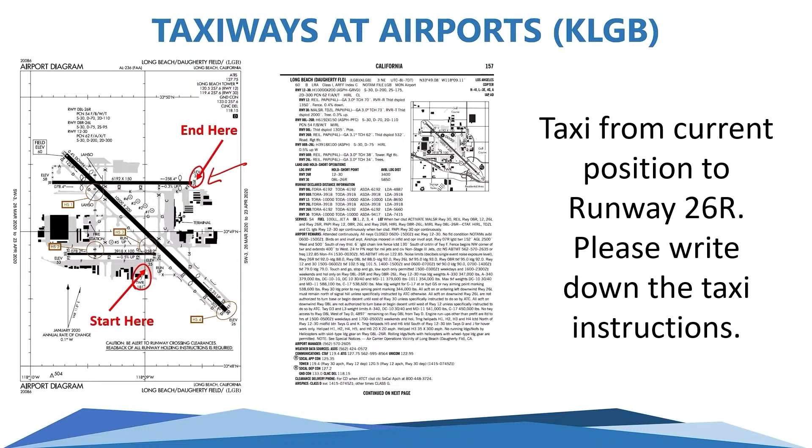Remember what I said in terms of, you can only cross a runway if you have explicit instructions to do so. So very simply, here's your zoomed in version, and I'll go through the instructions at the very top here. So the route is that red line I drew, and here's our starting point.

The very first thing I'm allowing you guys to do is taxi to runway 26 right. We're trying to get over here in that upper right-hand corner, and we're given via Foxtrot. So here's Foxtrot, then via Foxtrot 1, which is basically going to take me up to the edge of 26 left. Cross runway 26 left.

That's an explicit instruction to cross runway 26 left, so now I'm on the other side of that runway. Continue via Delta, and I'm going to take Delta all the way up until I get to Golf. Okay, and here's Golf.

Now you'll notice the difference here is that you did not receive an explicit instruction to cross this runway, which is runway 12 and 30. So if you do not have explicit instructions to cross, you have to hold short.

So for those that held short and are basically sitting right here, great job, you did the right thing. For those that continued to cross that runway via Golf, Charlie, Kilo, and Kilo 1, you ended up here, but you went a little bit too far, okay?

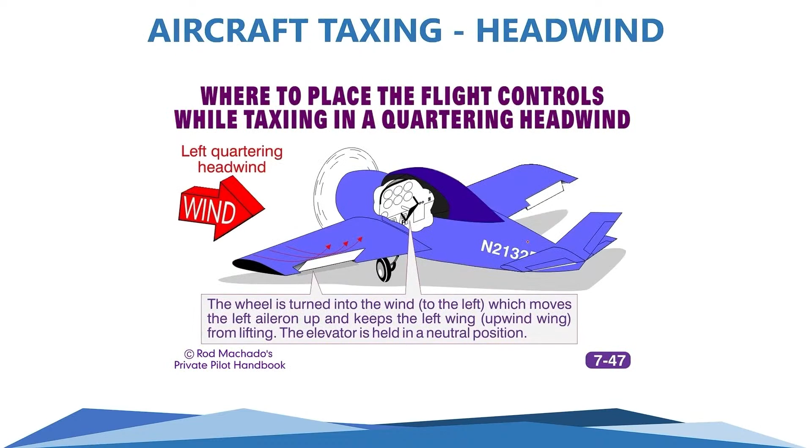And we'll be looking at those as well on Friday.